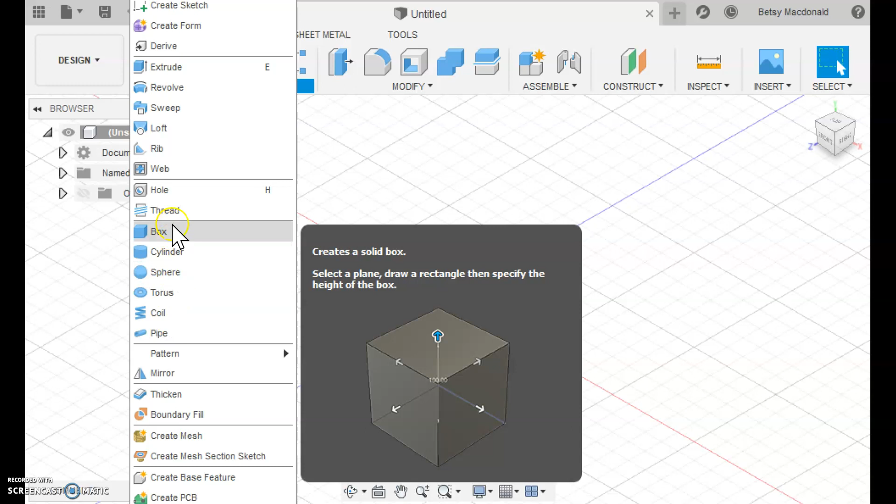This video will focus on the one-step method of creating a primitive shape onto another primitive shape. So as you hopefully know, the primitive shapes are here. I'm going to draw a box, and when you choose a primitive shape to use, the first thing Fusion wants to know is where you want to draw it.

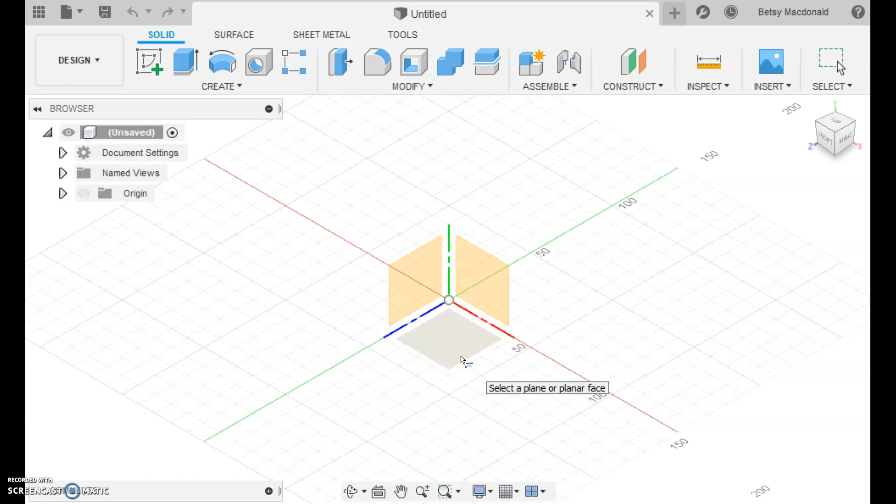Typically we choose one of these planes, but this choice is also something that helps us combine shapes once we have an existing shape. So I'll go ahead and click here to draw on the floor, and I'm going to draw from the origin and click to here, and then I will pull this up, and I actually have a perfect cube because I've used the same dimension on each axis.

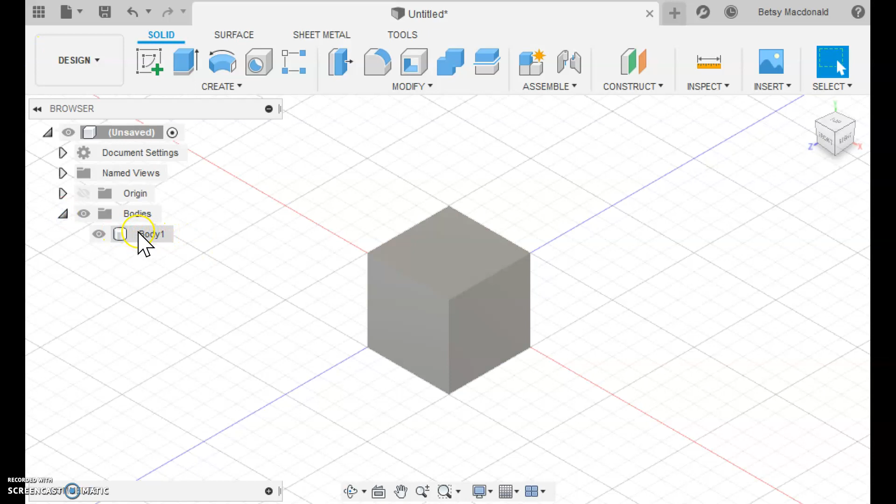So I have my cube, and you can see when you finish drawing a primitive, it gets shown over here as a body. I'm going to rename this just so we can keep track of things. So I'll call that cube. And let's say I want a cylinder sticking up out of it, and I only want to have one body when I'm done. Well, you can do this as a one-step process by going to Create and Cylinder.

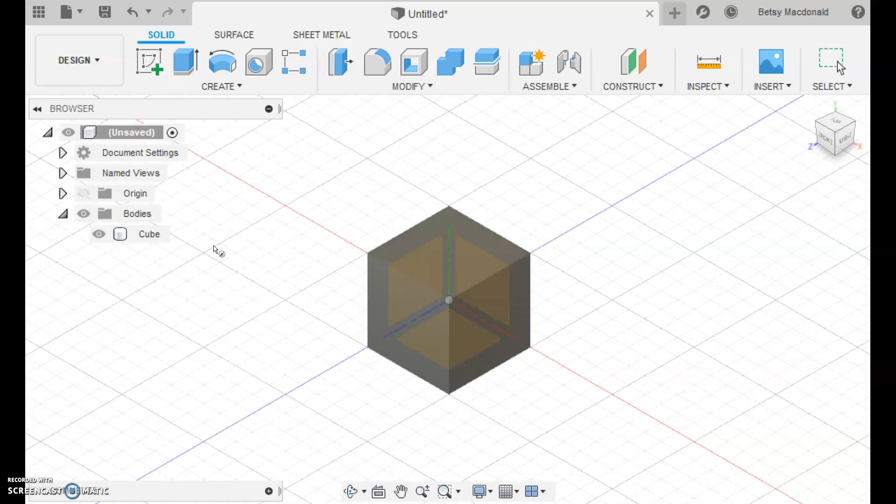Instead of picking a plane, you can actually choose the face of an existing shape as long as it has flat faces. So I'm going to go ahead and click the top of my shape, and now it's ready to draw the base of the cylinder. And actually, I'm going to switch to the top perspective, because if you move your mouse around, you can see it knows where it is in terms of whether it's at the center or whatever.

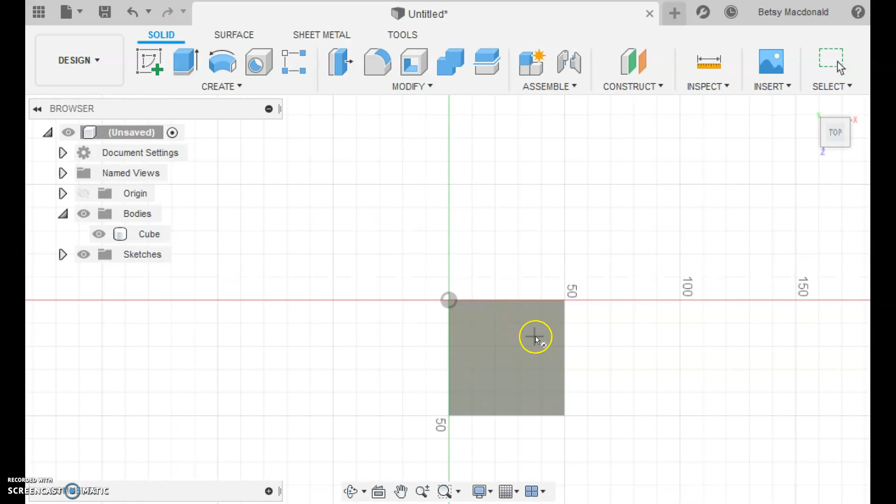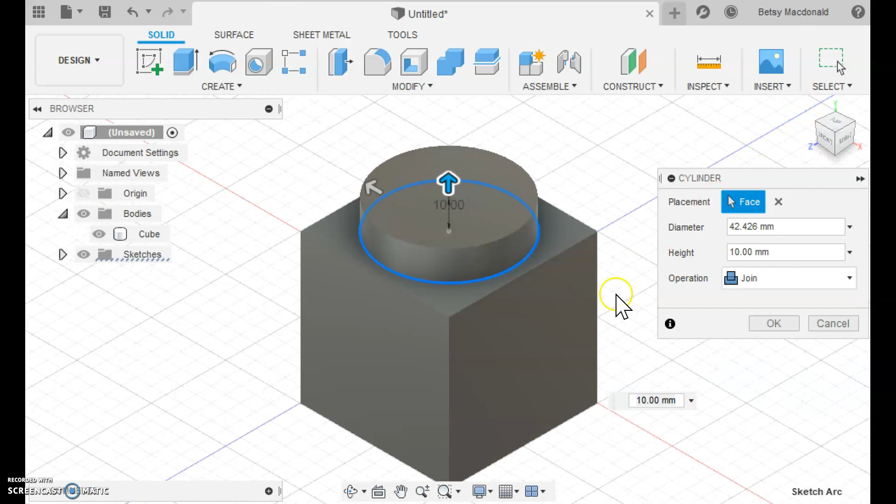And the grid lines underneath it help too. But if I click right here, it shows you that I'm in the center. So if that matters, it's nice that it will snap to those locations. So I click that. I can select the base of my cylinder. I'm going to go back to the home view and then zoom out a little bit. And then I can pull that out, and I want to show you something.

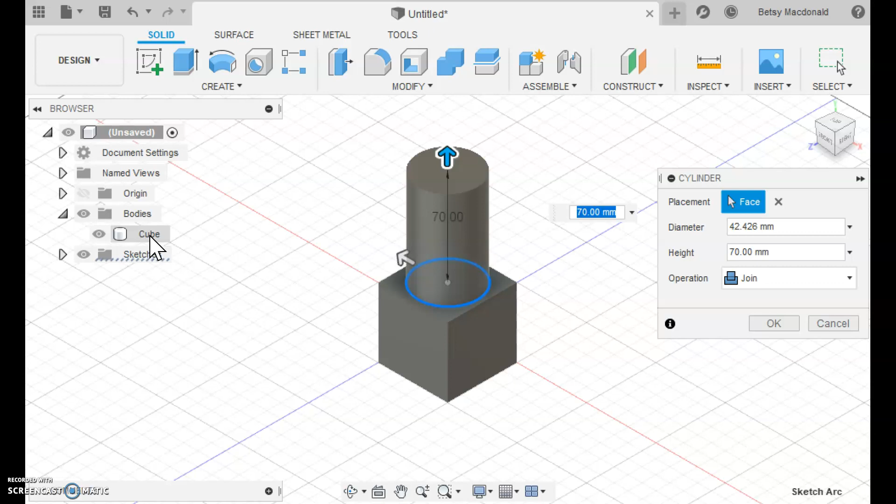So normally I'm ready to finish this cylinder, and I can either click OK or hit the enter key. And I want to show you that right now I still have my cube body, and usually when we create a second primitive, once we click OK or hit enter, we'll see our newest body there. But watch what happens when I click OK. I got my second body, but it's looped in with the original cube.

So it's nice that you can create a primitive to be part of another primitive by drawing from one of the faces. I have another video to show you a different method, especially to use if you need to add something to another object that doesn't have a flat face. But that's a pretty simple one click. Well, a few clicks, but it's one click to get you to draw on the face of another object.